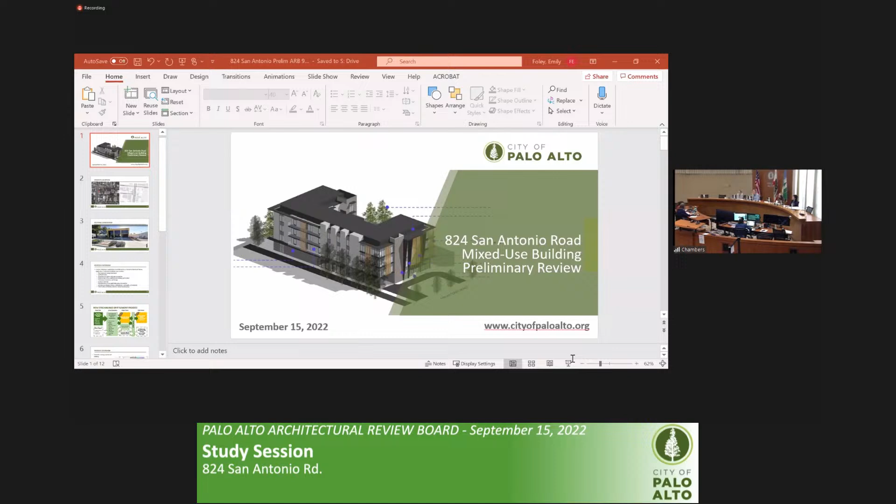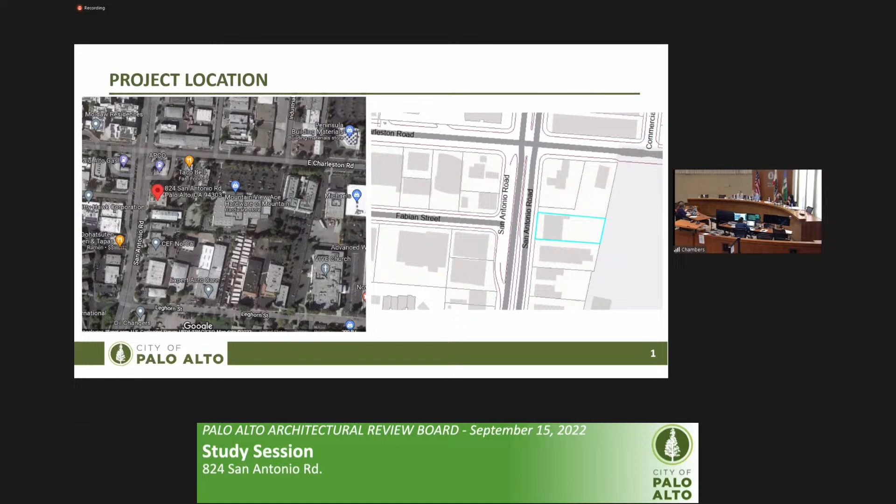Good morning, board members. This is the preliminary review presentation for 824 San Antonio. This project is located near San Antonio Road and Charleston Road. As you can see from the map, it's also close to the border with Mountain View. Everything to the rear of the project is essentially within the city of Mountain View.

The existing building is currently a boxing gym. Prior to this, it was a nursing school, and this is the building that would be demolished. Adjacent uses include Hertz Automotive and a gas station. Across the street, there are offices near Fabian Street.

This is a preliminary application that will be followed by a formal ARB application. You may consider preliminary feedback relating to the objective design standards, scale and mass of the building, transitions in scale to the adjacent properties, relationship to the overall neighborhood, pedestrian orientation, vehicle access, and other items related to your typical purview.

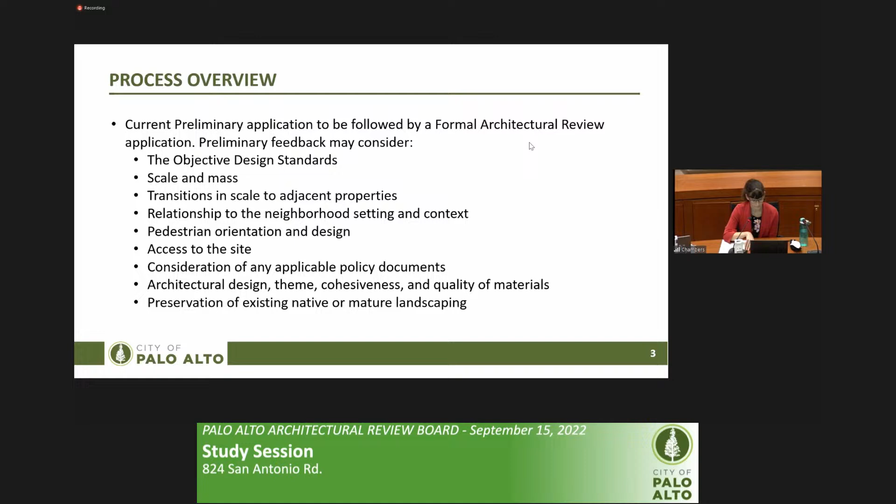As a reminder, this project would have the option as a mixed-use housing development project to go through the objective design standard process. As we will discuss later, the project as proposed today doesn't meet every single objective standard, so it is possible it would still go through the traditional process. But if it is able to meet all the objective design standards, then in addition to this preliminary meeting, there would be one ARB study session when they submit their formal application.

This project is also currently proposing to use the Housing Incentive Program, HIP, benefits to propose a higher floor area ratio than would typically be allowed in the CS zoning district. The project overview is to build a new 4-story mixed-use building, including 15 independent senior units, 9 assisted living units, and an 8-bed skilled nursing facility. The site plan shows the skilled nursing facility on the ground floor as well as a small retail component.

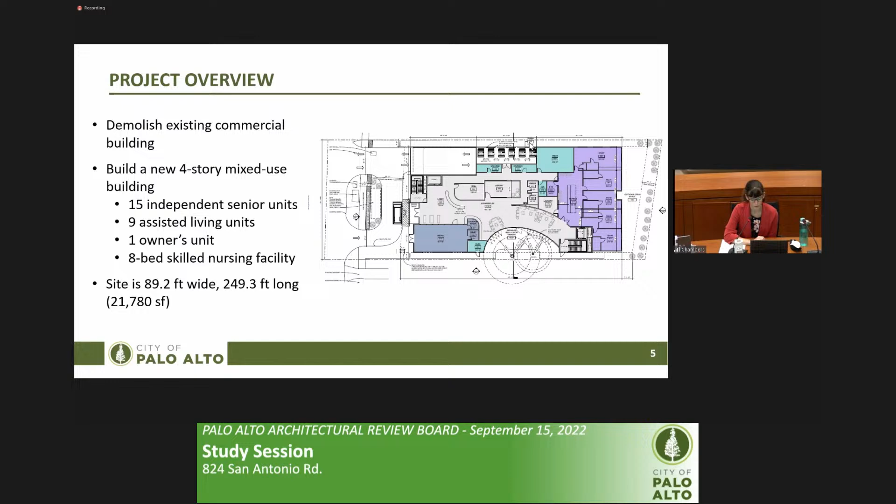This is in the CS zone, and as I mentioned, is using the HIP incentives. This includes the 2nd and 3rd floor plans. The 4th floor has the same footprint or layout as the 3rd floor, and this is where both independent and assisted living units are mixed together between the 3 floors.

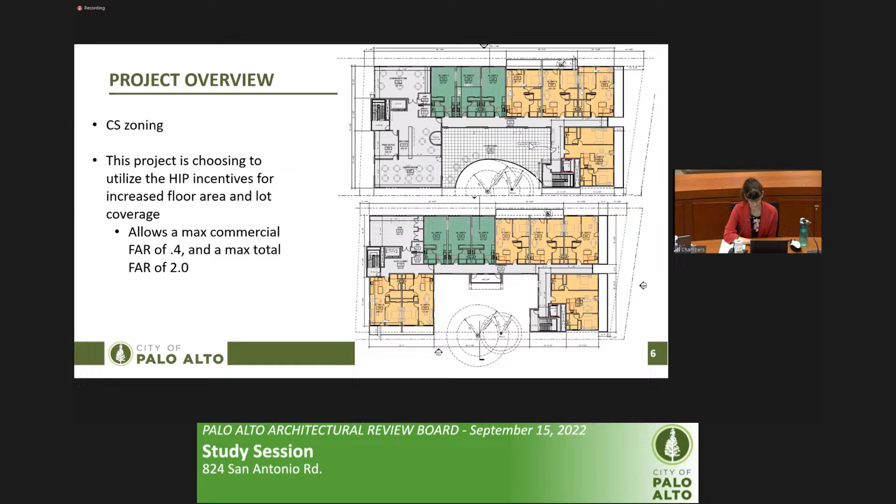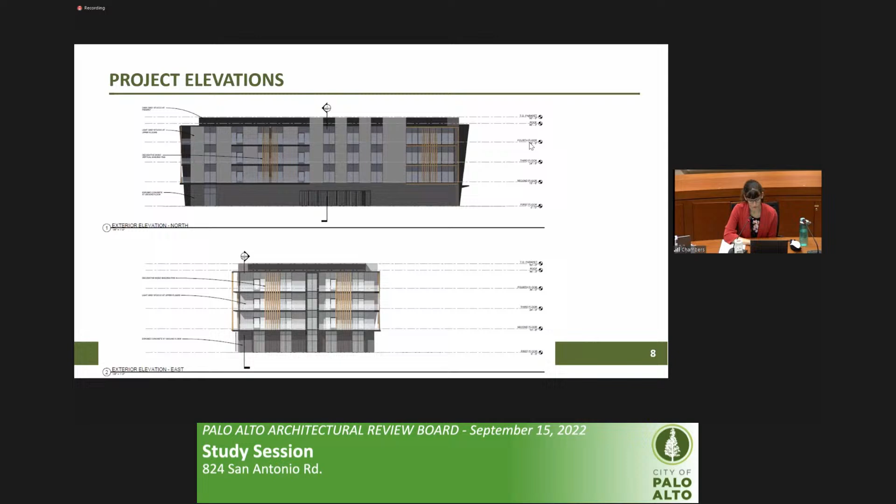Key considerations: since this is an HIP project, it has higher floor area than typically allowed in the CS zoning district. In terms of the objective design standards, this does not meet the build-to-line requirement. However, there's also a special setback along San Antonio Road, so the required setback is already 24 feet. The ground floor is set back to accommodate the drop-off zone. However, it's also possible to meet the build-to-line requirement by cantilevering the 2nd floor out over the 1st floor, so they would be able to maintain the usability currently shown on the ground floor.

Additionally, it doesn't meet the contextual step-back requirement since it is adjacent to 1-story buildings and would be more than 20 feet taller than it. That would typically require step backs on the upper floors, but this is so they can get the full residential density they would like this project to have.

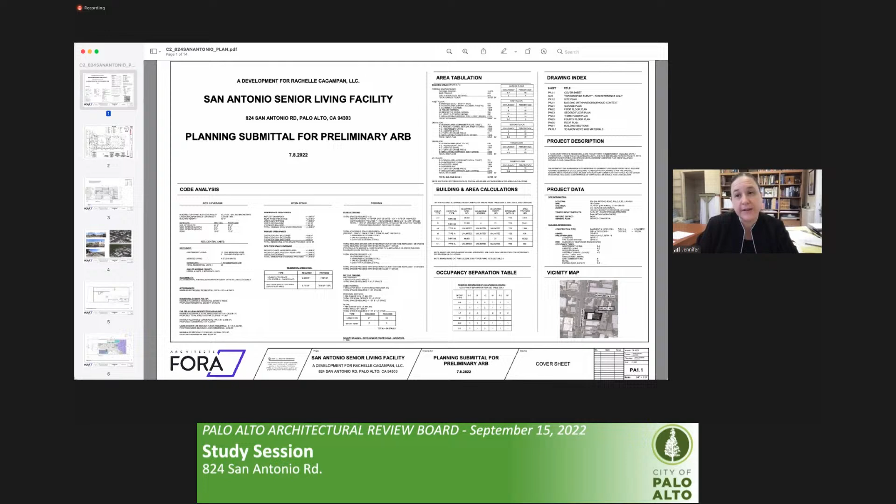The current structure on the property is a retail office structure and currently has 1 tenant, a boxing and fitness gym. Adjacent neighbors include a gas station, 2 fast food restaurants, and the Hertz car rental automotive facility.

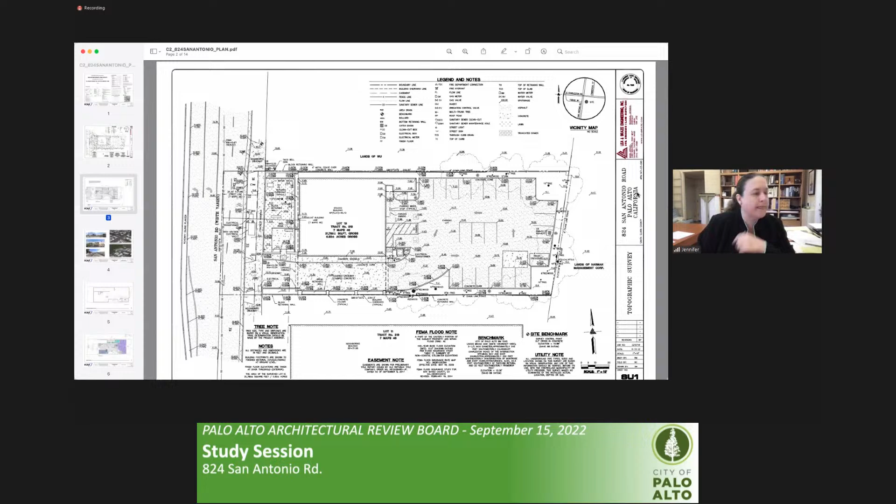The project extends the pedestrian clear path along San Antonio Road by 3 feet and will include an easement alteration to increase the public sidewalk area 12 feet and provide street trees to meet the new objective standard requirements. At the primary entry, we provide an exterior bench within the vehicular loading zone to provide a location for seniors to sit while waiting for pickup.

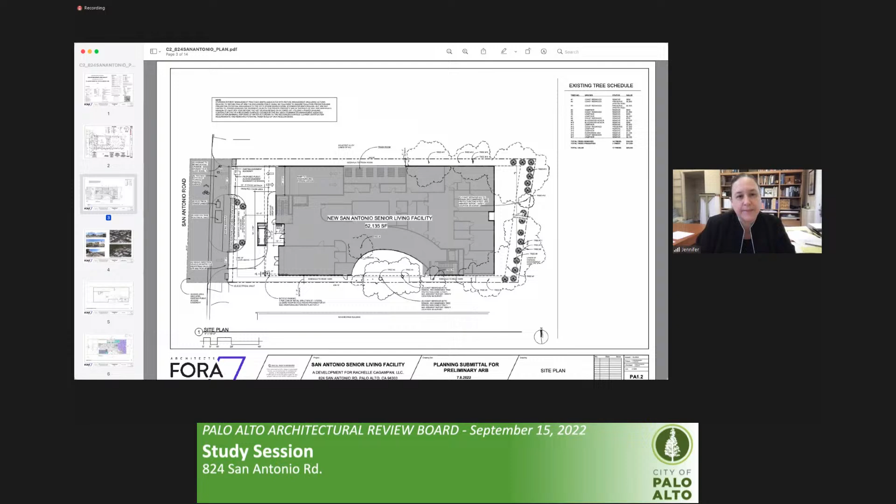You'll notice that we did not step back the building mass over the upper floors to create that relationship with the adjacent buildings. We did this because the site was added to the housing incentive program area, and we expect that adjacent properties will be developed to maximize density. So we did not elect to step back our building relative to a low-rise structure that has a high likelihood of being demolished and built up to higher density in the future.

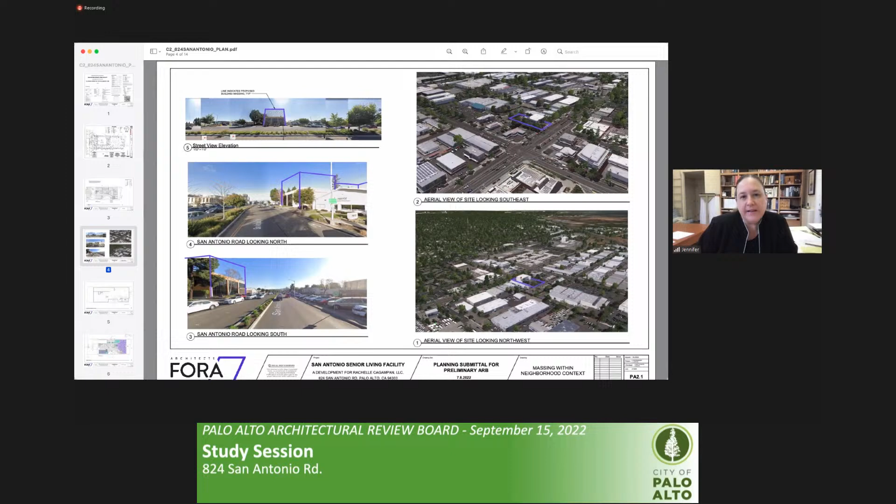Underground parking: there will be 32 parking spaces in the underground parking area, covering more than the required parking for the use of the spaces in this structure. There will be accessible parking, EV charging, and van parking with EVCS spaces.

There will also be 28 long-term and 6 short-term bicycle parking spaces on the property. The ratio tabulation for the bicycle parking is on our cover sheet.

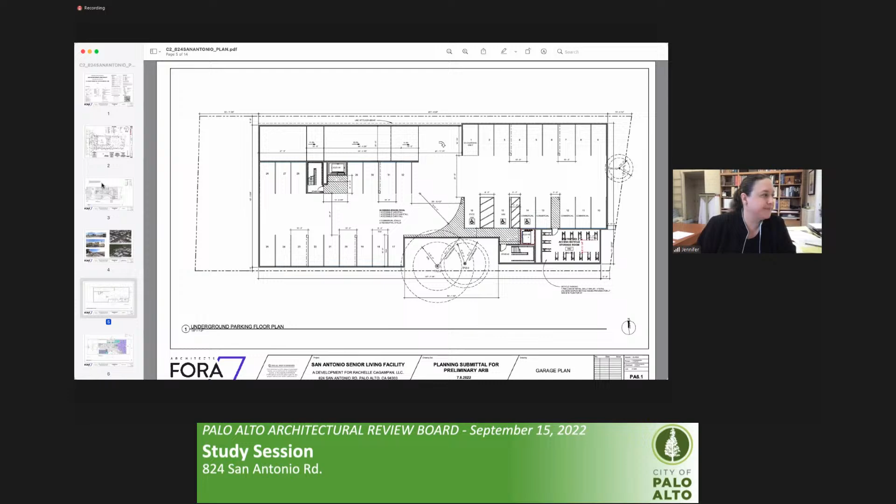On this level, there is a redwood reflection garden planned for residents, which preserves the 2 significant redwoods on the property. The rear yard open space is primarily reserved for staff and for skilled nursing.

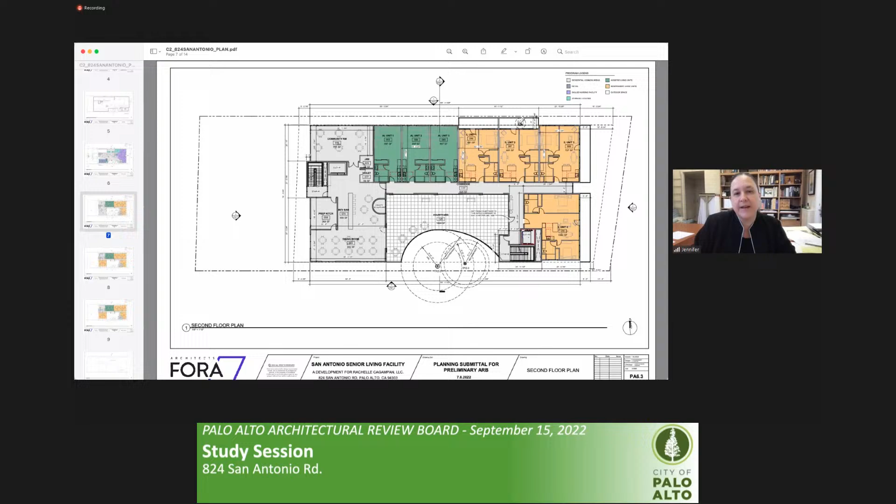On the second floor, we show 4 independent living units shown in yellow and 3 assisted living units in green. We're stacking the independent and the assisted living on the upper floors. Amenities on this level include a communal dining room, resident gathering space to host private parties, and education for the residents. There's also a warming kitchen planned so that food prepared elsewhere can be heated and served to residents.

There is a 1,864 square foot podium level garden on this level to take advantage of the views and the southern exposure. It's also oriented toward the 2 redwood trees. In addition, each independent living unit will have a balcony, and this view is towards the Santa Cruz Mountains as well.

The third floor is composed primarily of independent and assisted living units, and on this level we will also include a gym.

The top floor, the 4th floor, is similar to the 3rd floor, but with a community room for residents, stacked over the gym.

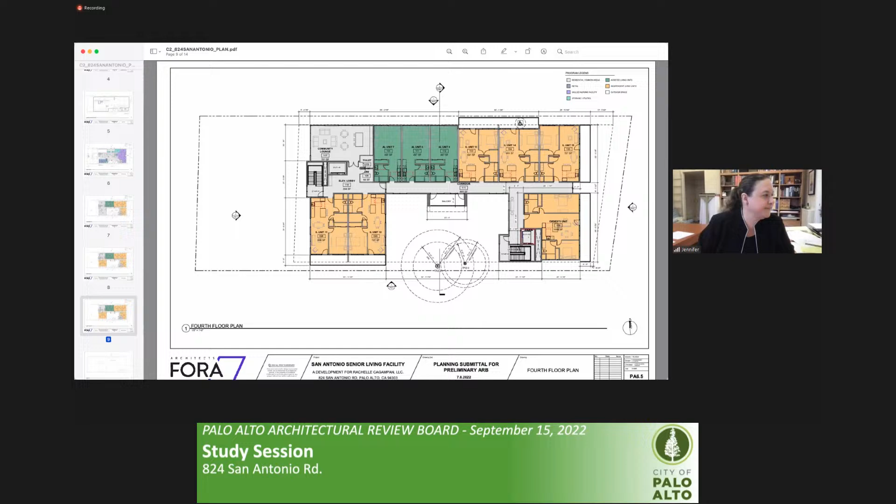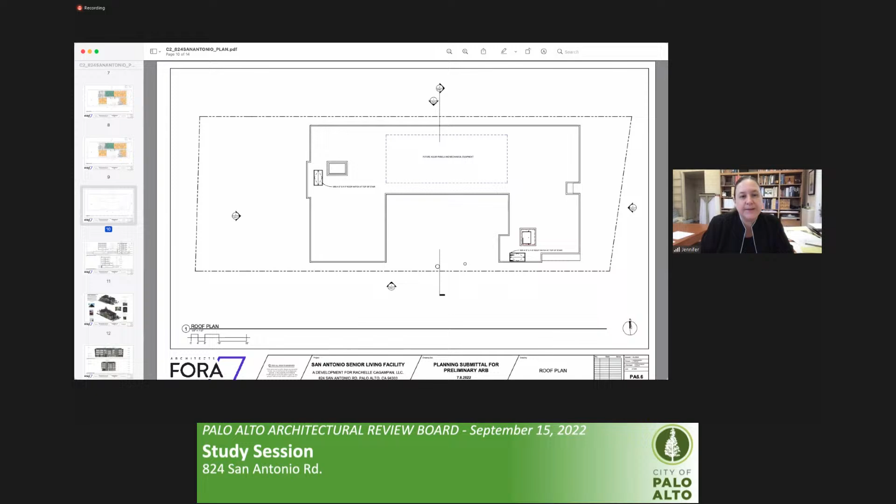The C-shaped design takes advantage of the southern exposure and views to the Santa Cruz Mountains. Sunlight is an advantage, we all know, for senior health, keeping up their circadian rhythm, improving vitamin D and their eyesight. The building height is 50 feet measured at the parapet.

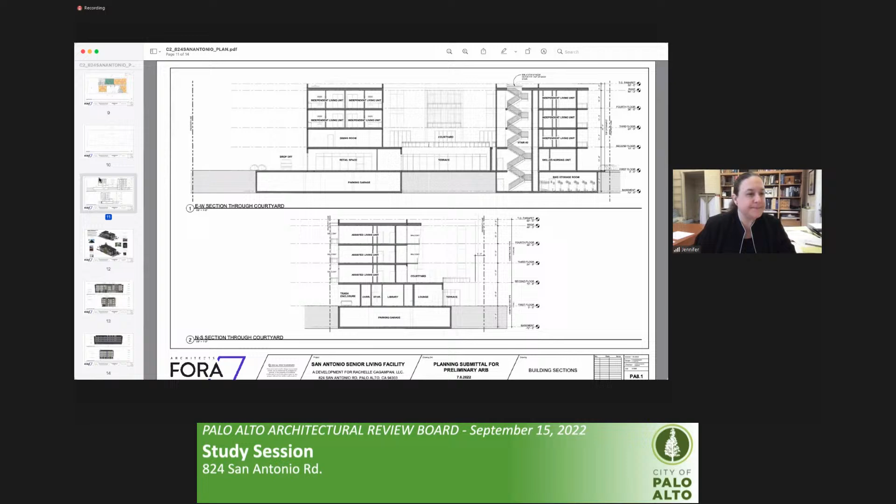The overall design and choice of materials for this project is intended to appeal to senior residents who have lived a modern lifestyle. Our focus on using green, sustainable products with a concern on the carbon footprint leads to creating spaces that utilize natural and sustainable materials inside and out.

Wood and plant covered screens are included to provide privacy and to soften the hard edges. Metal screens are also used with organic designs to vary the natural light. The owner wanted us to incorporate a strong sense of verticality into the facades to break up the typical horizontality we would see in similar types of housing projects.

A focal point on the interior lobby will be something we're calling the cenote sculpture. I'm going to zoom in just a little bit to show you a picture of what is a cenote, and we're going to utilize it as an oculus to bring in natural light. It's in a very organic form, a resemblance to cenotes found in Mexico, a natural feature that inspired the property owner while traveling.

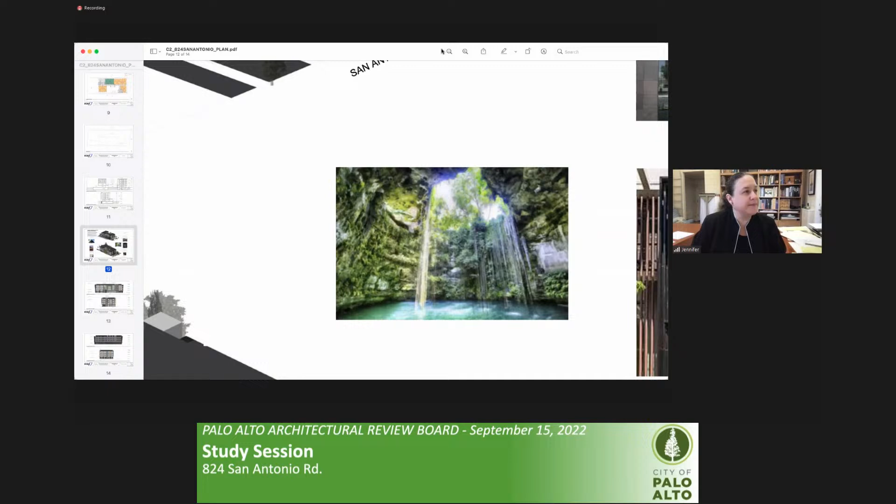The objective standards incorporated in the project include facade variation. We vary materials between the publicly facing ground floor and the upper levels. We articulate the facade; our use of biophilic facade materials like the green screens and twisting wood slats, wood soffits, and the organic pattern in the perforated metal screens are informed by our client's desire to incorporate pattern and texture inspired by nature throughout this development.

The datum lines are tapered balcony overhangs, and the primary entrance is clearly pronounced with a tapered overhang and articulated with a textured screen. The ground floor has a high floor-to-floor height in respect to the ground floor retail height requirements, and the retail area has transparent glazing facing San Antonio Road.

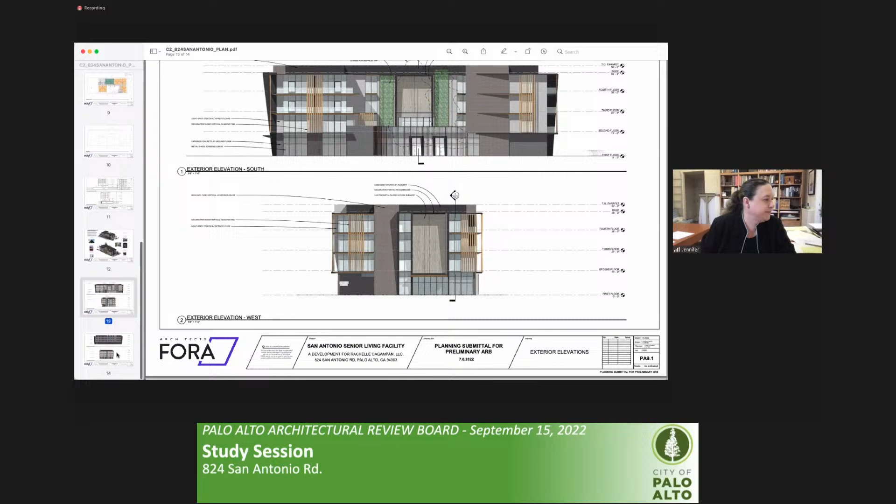On our north facade, the longest facade, a rhythm of solid and glazed portions is meant to break up the massing. On elevation it looks pretty flat, but we're also taking the elements forward and backward to create more interest on this elevation.

Thank you, and that is the end of my presentation, and thank you for giving us the opportunity to provide this presentation. We look forward to hearing your comments.

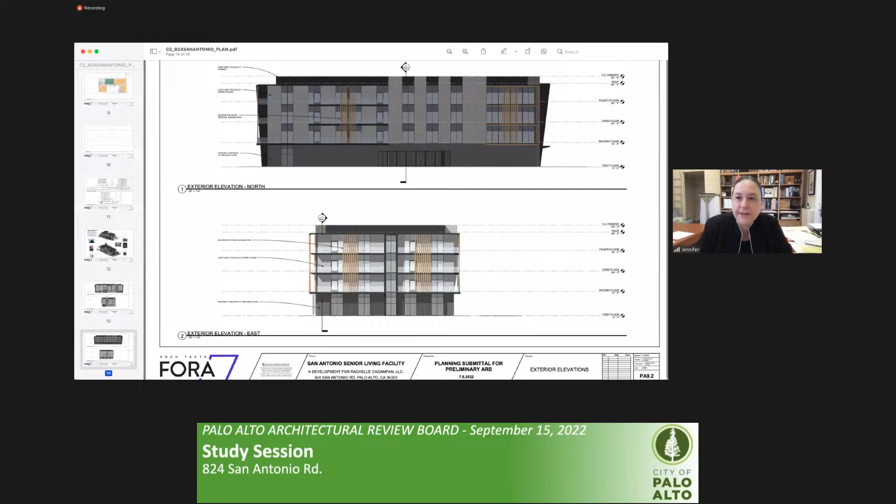Congratulations, Jennifer. You're right within the 10-minute limit, which is very impressive.

All right. Thank you. Thank you.

So now we'll go to some questions that we might have for you. Who would like to start that? Peter? Anybody? Speak up. Yep. I have a list of questions. Okay. I always start. You want to go ahead? You go ahead, Angie.

Okay, thanks. I will just start. Thank you so much for your presentation. I have a bunch of questions. The first, maybe we can start with the basement. So first question is, I saw the bicycle storage room. I want to know how people can access from the ground level to the bicycle storage at the basement.

Thank you. Yes, well, we have multiple options for accessing the bicycle storage. Again, this is more long-term storage rather than short-term storage, which will be located at the ground floor level, so people going in and out day to day will have a place on the ground floor level. With this level, you'll be able to access it through the stairwells, the elevators, as well as the entrance to the parking, but primarily through the stairwells, which will have access from the outside.

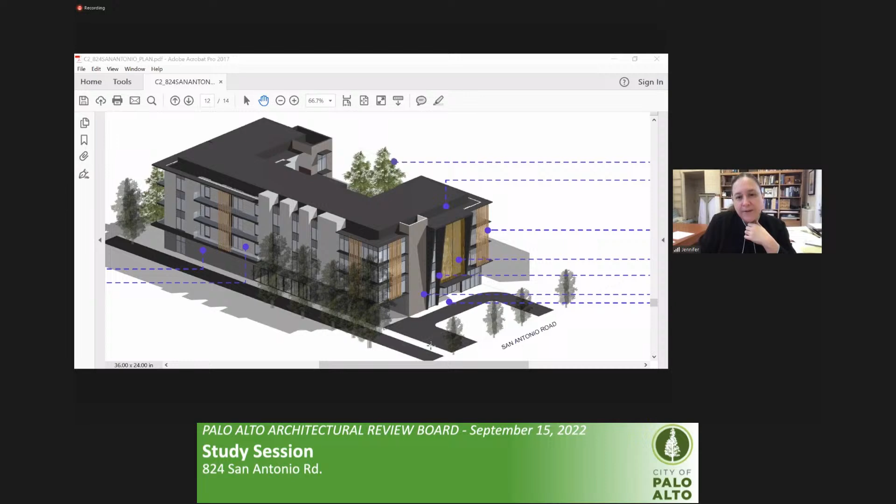Yes, I did notice that the balconies do that on each side. Do the vertical wood slats do that as well? Yeah, the vertical wood slats are also... the vertical slats are not completely vertical. We're actually taking the wood and twisting it slightly so that when you look at them, they'll look thin, then thicker, then thinner again. There's fins coming out at the entrance. So the wood slats are not intended to be completely straight up and down; they're twisting the wood so it goes from thin to thick to thin to thick.

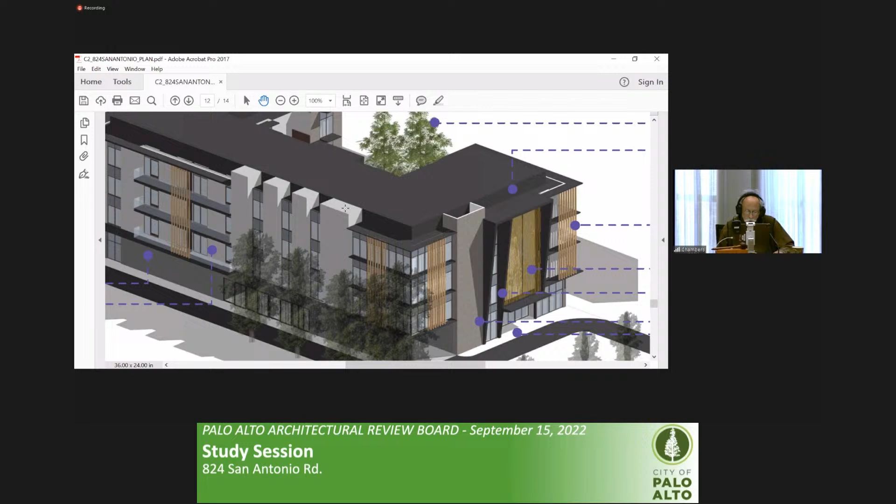I'd like a couple of additional comments here. The commercial use of the ground floor, if used by outside folks, how do they get there? Do they come by car? Do they go in the garage? Is the extra parking for commercial use of this building? Yes, the extra parking is for commercial use.

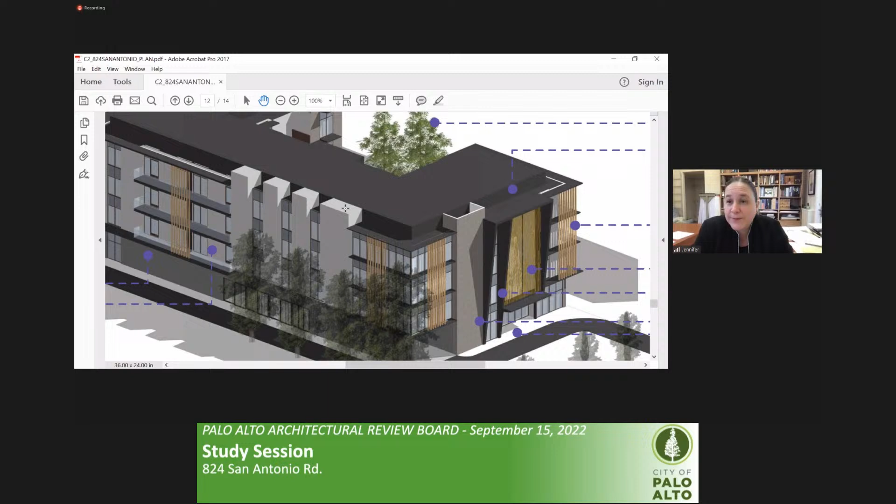Bike paths—have you considered anything concerning a bike path on San Antonio Road? I know you've increased the sidewalk width, but how about a bike path? Is there any thought to that? We love bike paths, but that would be in the public right of way. We do have bicycle parking and ways for people to bring their bikes onto our property.

So I think everybody's had an opportunity to ask enough questions here. Anything to add? No? Chair, if I may, I believe we have one member of the public that would like to speak. Yes, okay, and we'll bring it back to the public. Let's hear our first speaker, Nava Humberto.

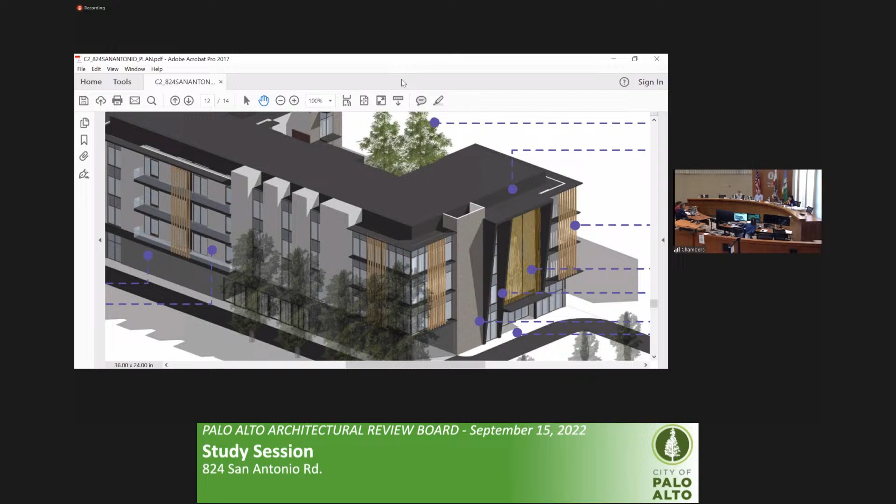Yes, can you hear me? Yes, we do. Good morning, board members, thank you for letting me speak today. My name is Humberto Nava, I'm a field representative with the NorCal Carpenters. I just want to ask the applicant, is there going to be any labor standards attached to this project? This is a great senior facility that will take care of our seniors, but I had a question—are they going to take care of the workforce, the working men and women who will be working on these projects? Just throwing it out there in case they haven't already thought about what kind of labor standards they have on this project. Thank you.

Not sure how we address it. Yeah, I don't think that's for us to answer. I think that's for the applicant if they choose to answer. Certainly not us. Would the applicant have any comment about that? It's something we'll definitely discuss with the owner. Okay, well, I think...

Really quickly, we'd like to mention that we also received a comment via email. It's been printed out and you have it in front of you. It appears to be regarding traffic during construction, which again, the interface between a construction project and our public streets is something we won't take into consideration. It's really not up to us to comment on that issue, because the construction job will be run according to the rules of the city—it doesn't seem we can speak to that. Our Public Works Department definitely does a logistics plan for construction. I think the comment is saying there's lots of construction on San Antonio, which is correct, so we'll bring that to Public Works' attention. I'm sure they already know, but we'll see if there's any coordination we can do with the various construction sites.